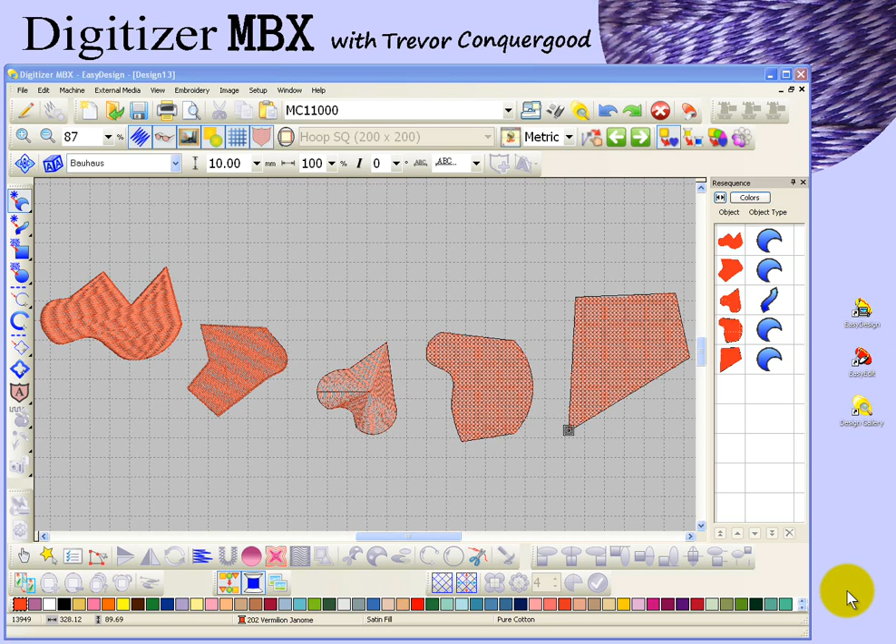In this segment, I'm going to take a look at the Turning Angle Fill tool. And that's found here on the left-hand side of your workspace, the top of the digitizing toolbar. So similar to the other tools that we've looked at so far, the Parallel Fill tool and the Circle and Square tool, this tool also has options.

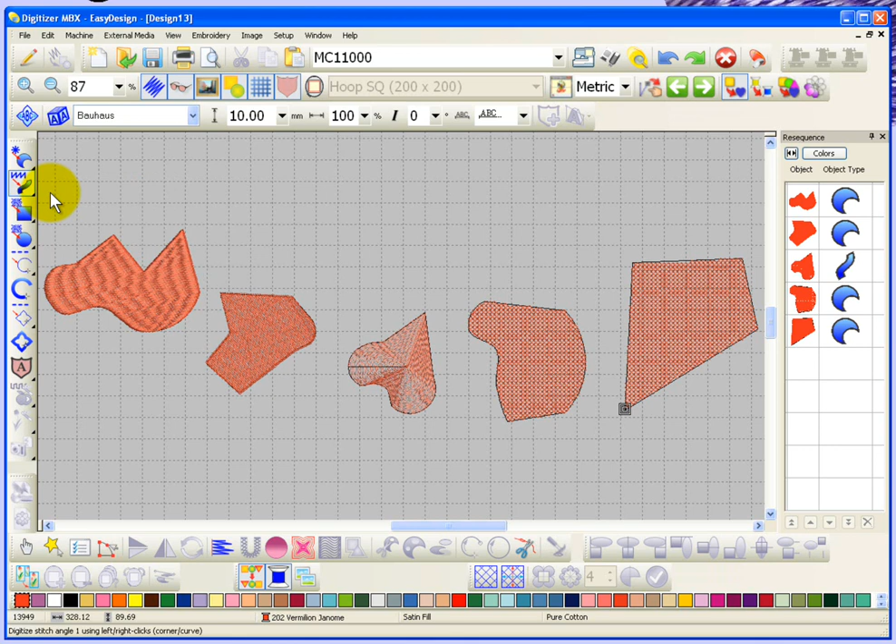And if I fly it open, we'll take a look and see that we have Turning Angle Satin Fill, Turning Angle Weave Fill, Turning Angle Embossed Fill, Turning Angle Contour Fill, and Turning Angle Radial Fill. So I'll go ahead and choose Turning Angle Satin Fill to start out, and I'm just going to clean up my desktop by saying Control-A and Delete.

And maybe what I'll do is zoom into a smaller area and show how this tool works. Now, this tool is very different from the Parallel Fill tool because we no longer need to draw the outline. In this case, we need to draw in sets of points that make up the stitch angles. So it kind of goes like this. Oh, sorry, I need to select the tool.

I'll put in the first point, and then I'll move over and I'll put in a new point, and that will be a stitch angle. Now, the mouse becomes connected back to point number 1, and I can bring it down and create point number 3 and point number 4, and those become the next stitch angle.

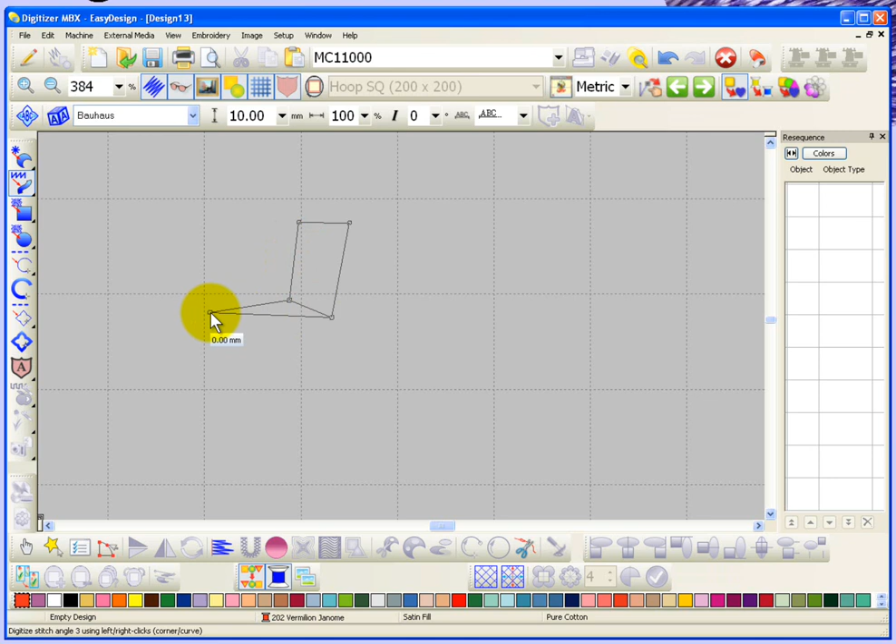And one more time, I'm going to bring it over and create point number 5 and 6, and again a new stitch angle. And I can keep going like this, putting in as many sets of points as you like until I hit enter, at which point it closes the shape and fills it in with thread. Now let's take a really close look at that object.

So you can see here that the stitches, this is why it's called Turning Angle Fill, because the stitches turn from angle 1 to angle 2 to angle 3 to angle 4. And so each of those sets of points is how we create this object. And like I said, the stitches are no longer parallel, they're turning.

So if I was to select that object and choose Reshape, you'll see that with this object, I have the ability to adjust the stitch exit point and entry point, so you can have it start anywhere in the design you want. You can have it finish in any place of the design that you want.

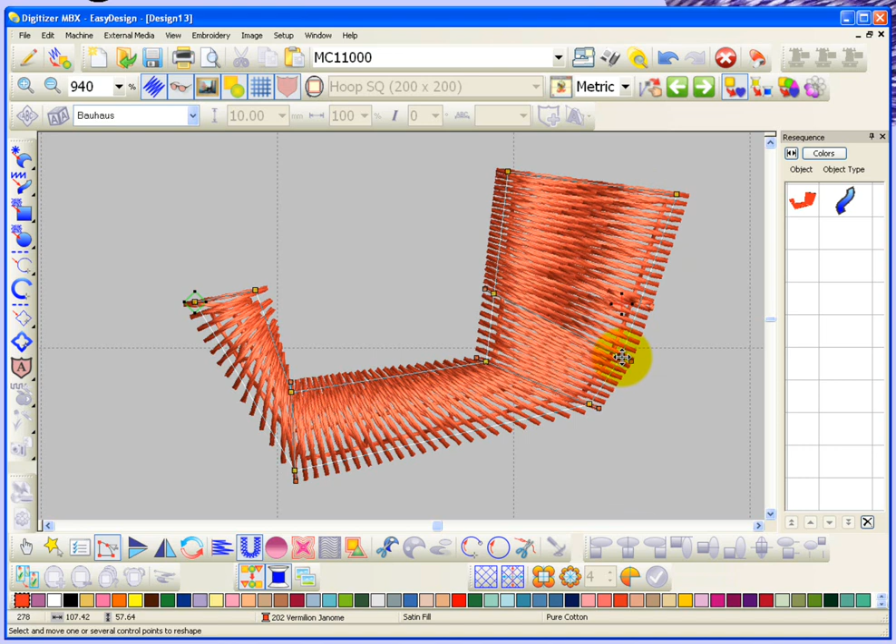And just like any other object, you can change the shape, so you can move the nodes. You can add new nodes just by clicking on the shape, and it adds a new set of nodes. But what's different here is the nodes have 2 points. Now maybe if I can get really close you can see this. Maybe if I turn the 3D view off, it helps a little bit.

Oh, and I actually just clicked on the line and added a second set of nodes there. I'm going to hit undo for that. So this is what it looks like. The yellow point is the actual shape node, and notice that right beside it there's a small orange triangle. That's actually an angle line for this set of points, and you can adjust them independently of each other.

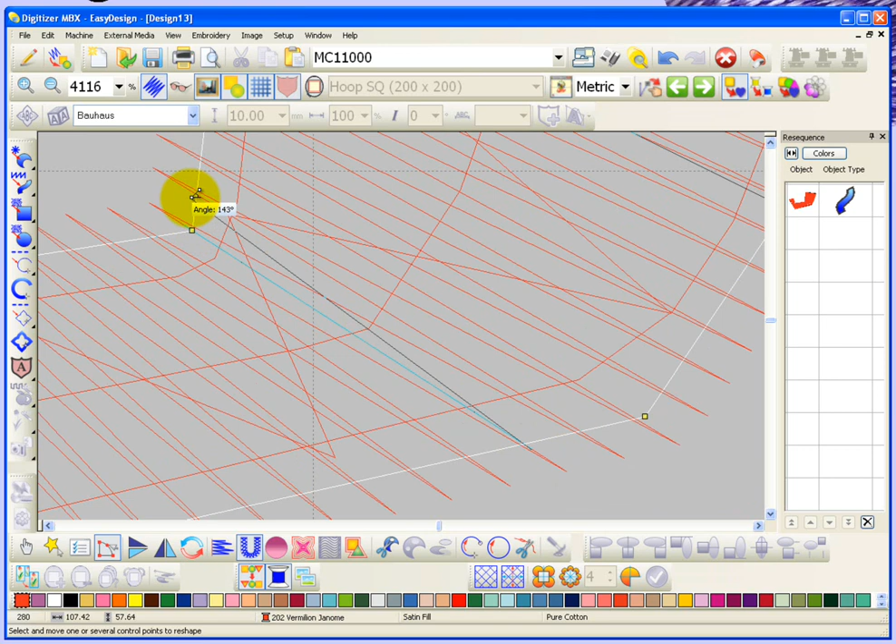So see, I left the shape node there, but I was able to turn my angle line just ever so slightly. So you have the ability to adjust your stitch angle after you enter in the shape nodes. But if you just choose to change the shape node, it will pull the angle line with it. Did you see how that worked? Let me get a little closer here.

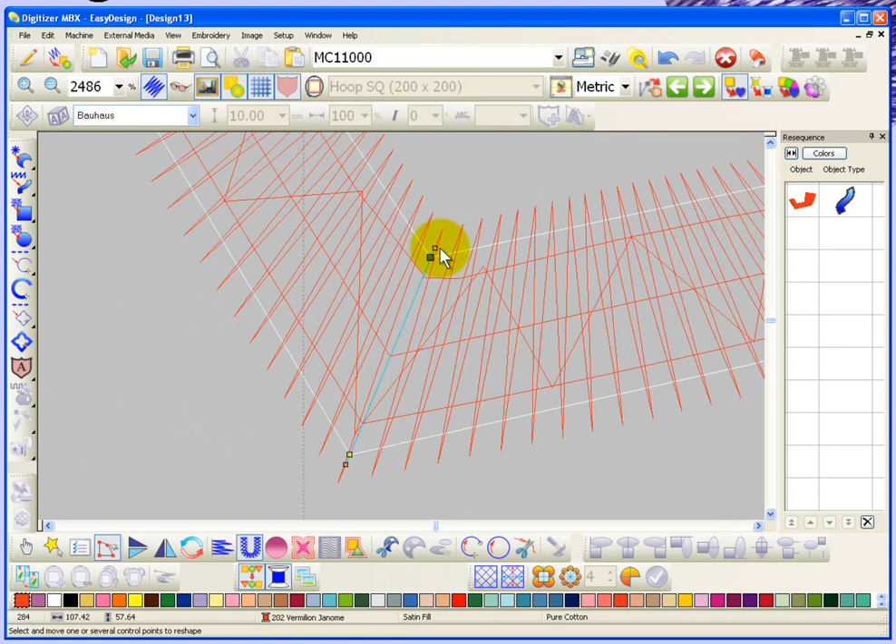If I just grab on this corner and move it, the angle node is moving with it. But if I grab the angle node and move it, it will change the angle independently of the shape. See that? And now if I move the shape, the angle line still sticks with it. So when you move the nodes, the angle lines move with them.

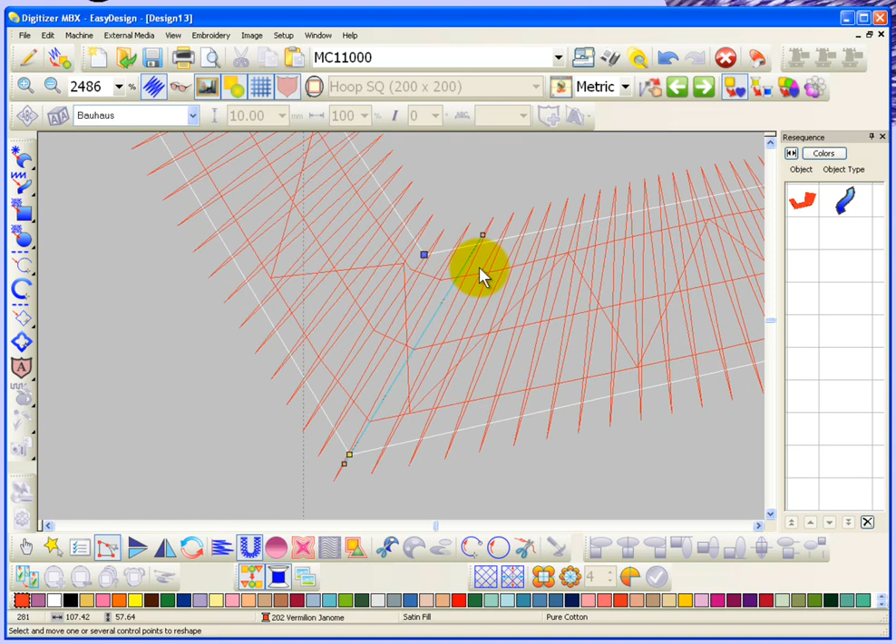But if you move the angle line off of the nodes, it will move independently of the shape node, but you can still move that shape node and the angle line gets moved with that. So that's a little bit different. Now let's go back to creating some more of these Turning Angle Satin Fills.

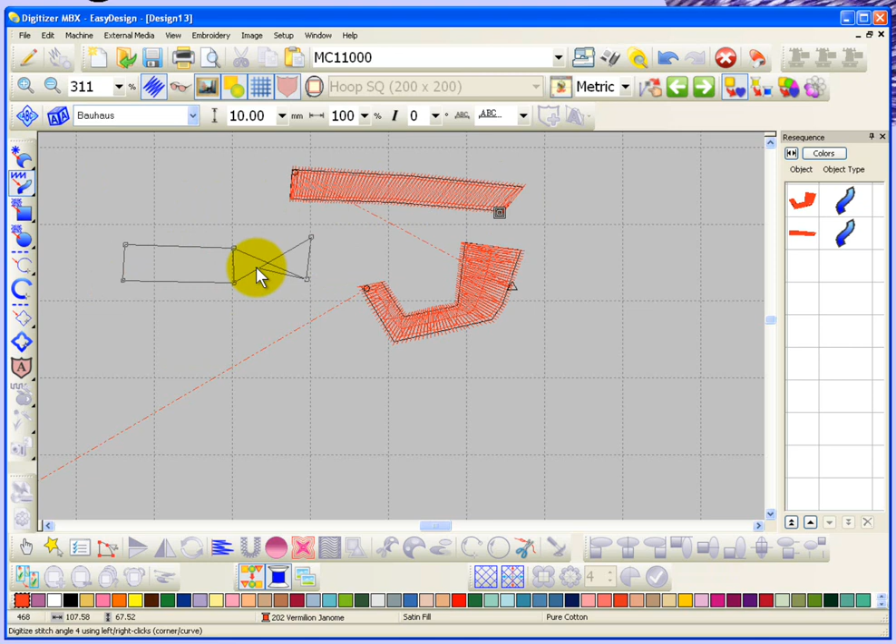And one of the things I like to say, this helps me to remember how to use the tool, is I might say to myself, top, bottom, top, bottom, top, bottom. Because if you cross the lines, I'll start another one. If you say top, bottom, and you're going along top and bottom, and then you switch and you forget and you go bottom, top, you've crossed your lines. And what happens is, if I hit enter, the thread kind of just twists onto itself a little bit and starts up again.

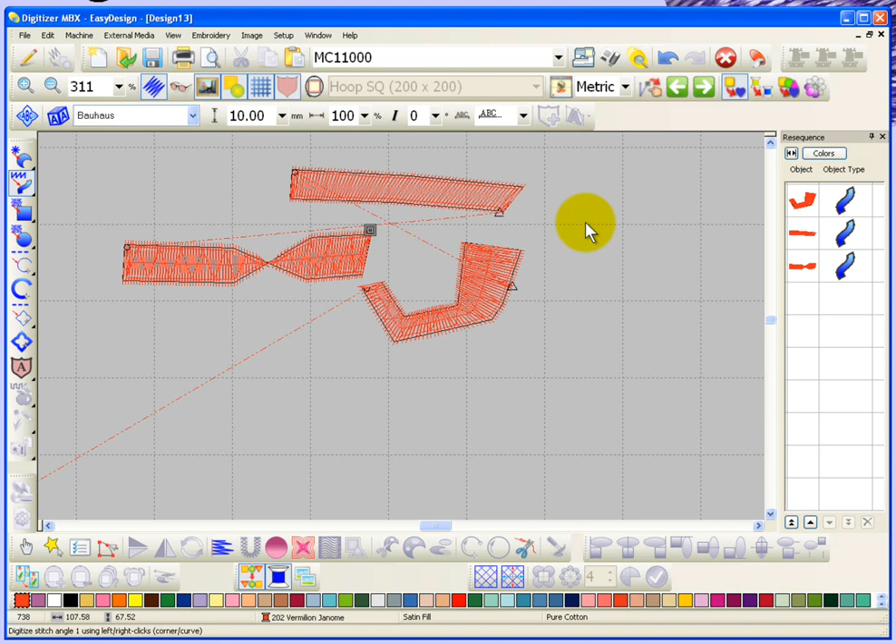And it won't necessarily be a problem for sewing, but you don't have a nice consistent border like it's meant to be, so you have to try to keep track of which side is which. Now, you don't have to say top, bottom. You may want to say left and right, or it could be something more like inside, outside, inside, outside.

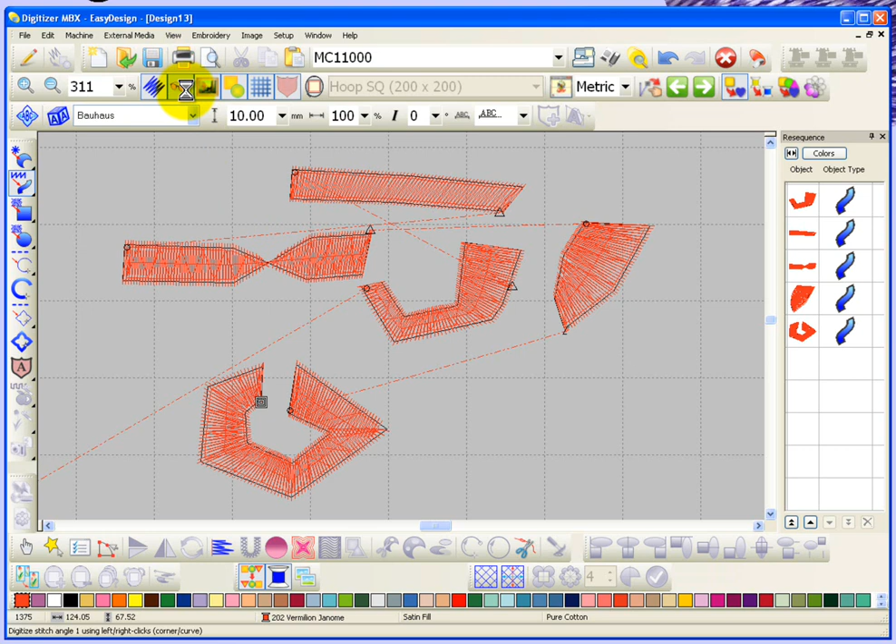So it's really up to you how you use the tool or how you remember which side is which. But that's one thing that I've found that works really helpful for me, is to be able to sort of keep track of side 1 and side 2 a little bit separately.

Now, that's parallel satin fill. We also have turning angle satin fill. We also have turning angle weave fill. And same thing, 1, 2, 1, 2, 1, 2. And primarily the difference is one has got stitches through the middle, one has stitches on the outer edges. And so, as you get into larger stitch areas, you'll want to switch to using a weave fill versus a

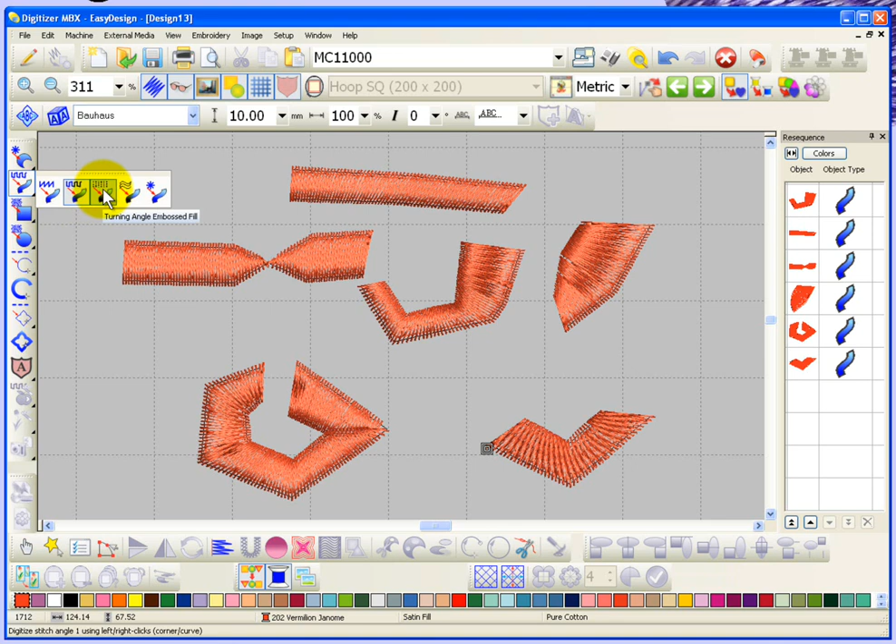satin fill. Another tool option would be a turning angle embossed fill. And again, I'll just go ahead and create 1, 2, 1, 2, 1, 2, hit enter, and you can see that although the stitches turn, they also have a pattern in the background. So that's the embossed fill option.

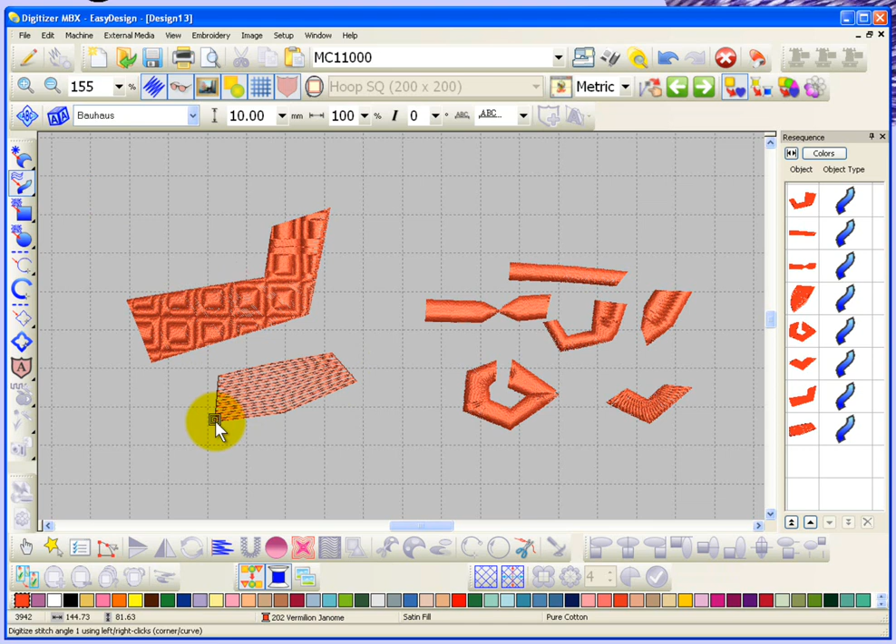So let's take a look at the next tool option here, which is the contour fill. And again, if I say 1, 2, 1, 2, and 1, 2, so I'll put in 3 sets of points and hit enter, and you'll see here that the stitches turn quite differently on my shape. Let's just take a look at that.

So that's the contour fill, and I'm going to go ahead and create a contour fill with the parallel fill tool, just so you can see the difference, and I'll create the same shape. So we'll put in here points with the parallel fill tool to create the same shape, hit enter, and yet the contour is very different. So the contour fill on a turning angle will look different than the contour fill on the parallel.

So if you use the contour with this option and you have a different sort of shape, you'll see the way that it contours around your shape. So there's 2 different contour tools that give quite a different result to the type of stitches. And really, you'll find there'll be places where one will just seem more appropriate than the other. So one way or another, this is the turning angle tool, which I call the 2-point tool. This is the parallel fill tool, which I call the outline tool.

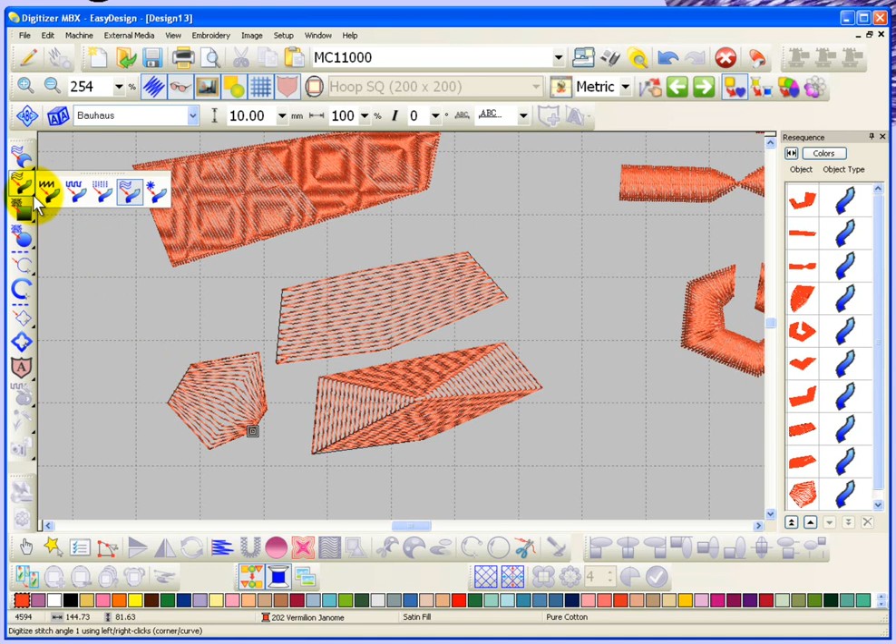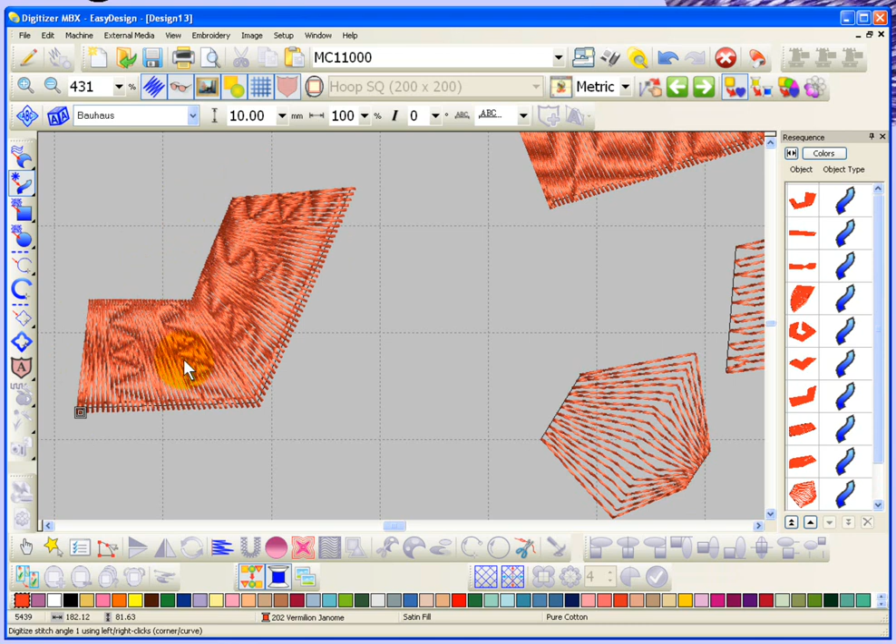Now let's see, I think there was still one more, so we can do the turning angle radial fill. And I'll just maybe make myself a little bit more space. And again, 1, 2, new stitch angle, 1, 2, and new stitch angle, 1, 2. I'm going to hit enter. You'll see that it has that radial fill pattern around the turning angle stitches. Yeah, so that's a little bit different tool from the parallel fill tool. This one's called the turning angle fill tool.

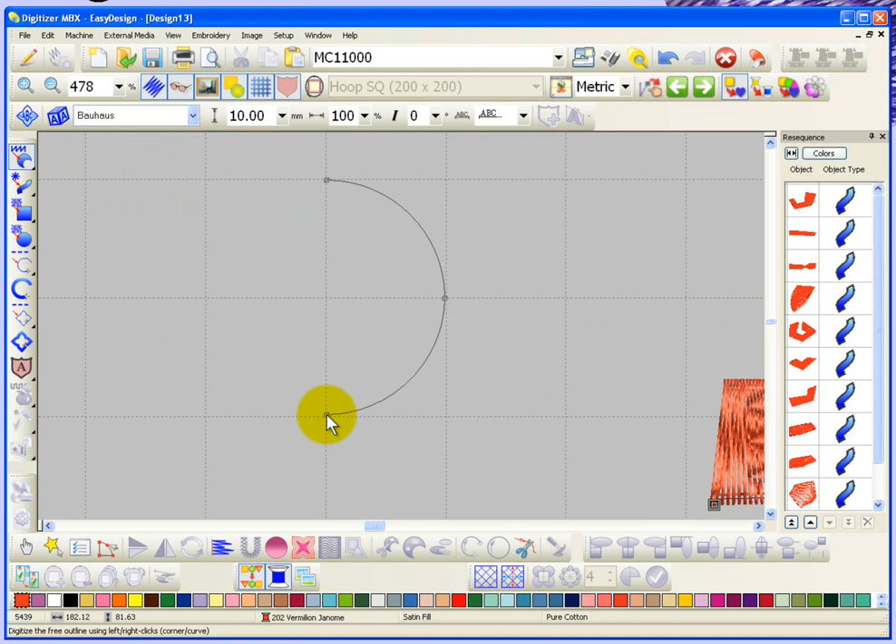Now, I'm just going to do a quick demonstration. I'm going to use my parallel fill tool to create a circle. So I'm just going to zoom in a little bit. Choosing my parallel fill, I'm going to choose a parallel satin fill, and we'll just simply go like this. Right click, right click, right click, right click, and when I hit enter, it's going to fill that circle in with thread. And that was created using the parallel fill tool.

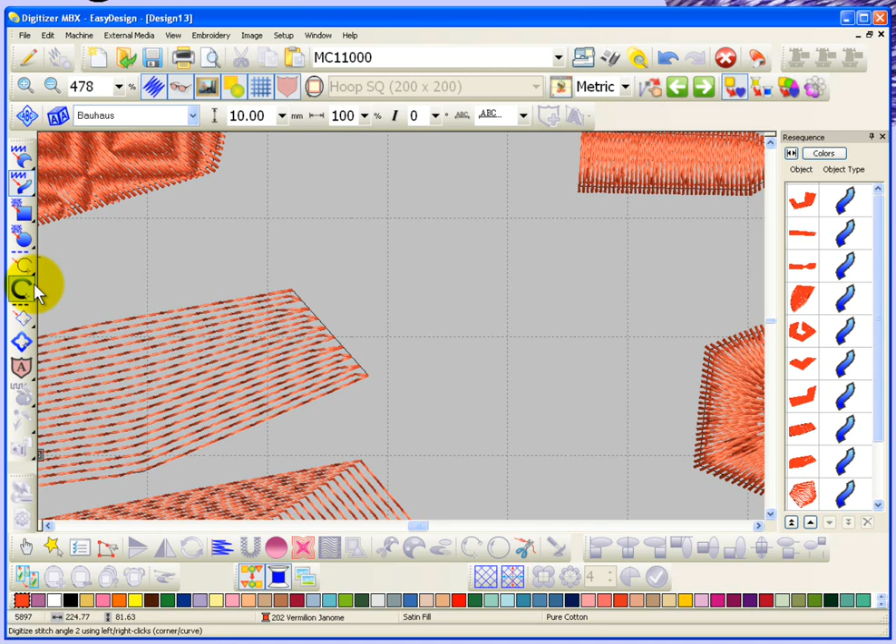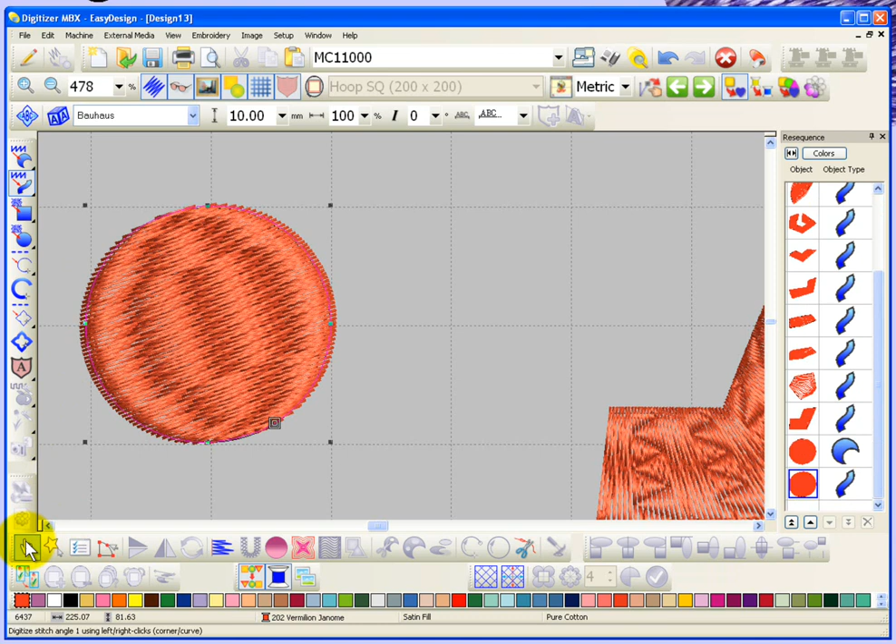Now, if I create a circle using the turning angle fill tool, I can create almost the same shape. If I go 1, 2, that's a stitch angle. Whoops, come back, that was my panning. All right, where was I now? 1, 2, that was a stitch angle. Now I'm going to create again 1, 2, and this time I'm right clicking to get the rounded points, and then coming down to the bottom again, 1, 2. So, very similar shapes, very similar stitches, but I created them using different tools.

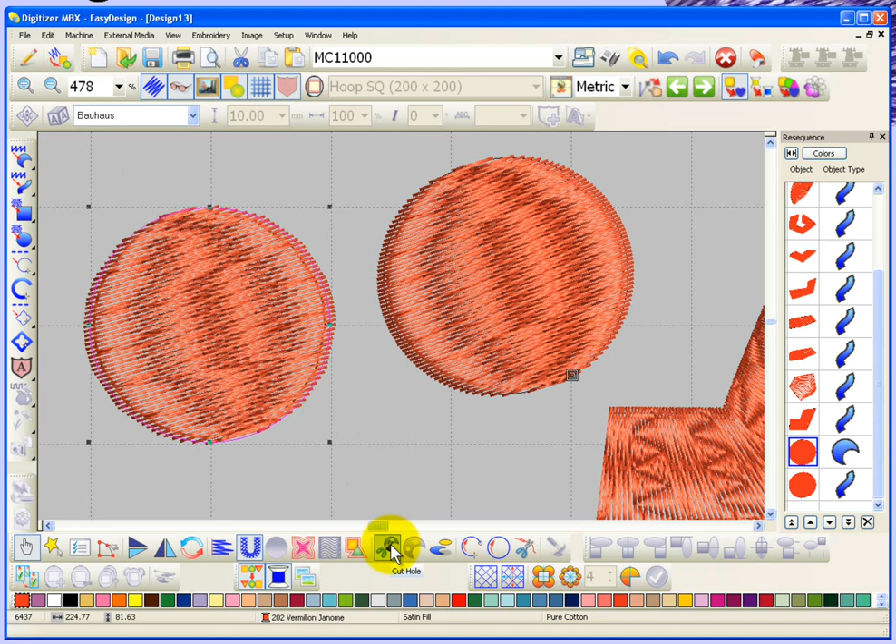Now, something I haven't shown, and I will come back to this, but I'm just going to quickly show this. For example, if I take the parallel fill tool, this was the circle I created using the parallel satin fill option. If I choose the cut hole feature, I'm going to cut a hole out of the center of this circle. Turn it into more like a donut. So there you have a parallel satin fill in the shape of a donut.

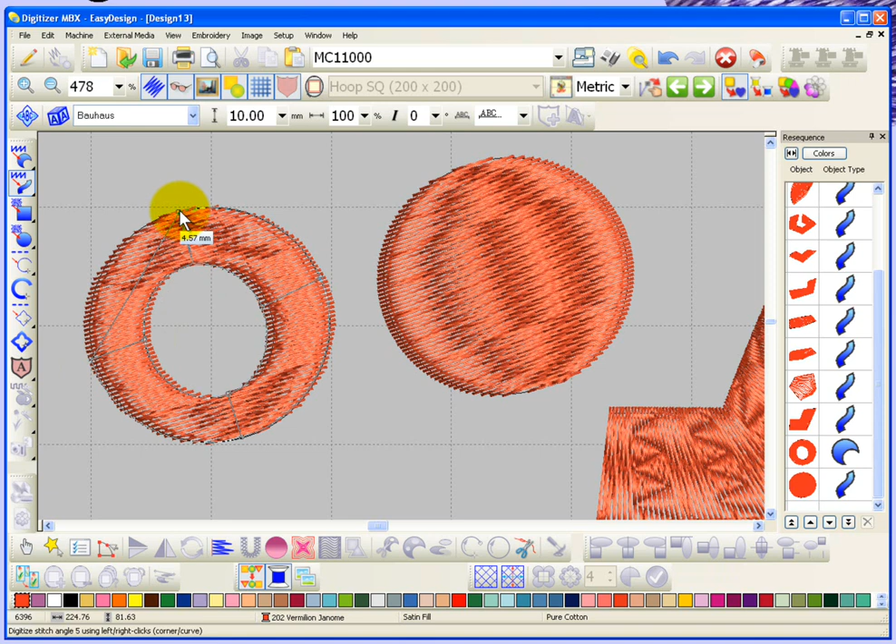But if I use the turning angle satin fill tool to create the same shape, I would need to go something like this. Inside, outside. And then I'll come over here and I'll right click, inside, outside. Come down here. Right click, inside, outside. I'm right clicking to get curve points. Inside, outside, and then one more time, inside and outside. And when I hit enter, it fills it in with thread, but now you'll see that although they're the same shape, very different stitch results.

You see, this stitch was created using the turning angle satin fill tool. And this object, this shape, was created using the parallel satin fill tool. And so here we can see the thread is parallel, all the same stitch angle. Here we can see that the thread is turning. What you can see here are known as shortened stitches, and I'll talk about shortened stitches again later, but basically they have to do with the fact that the stitch angle is turning quickly, and so the software is just trying to compensate for that by putting in a few little half stitches.

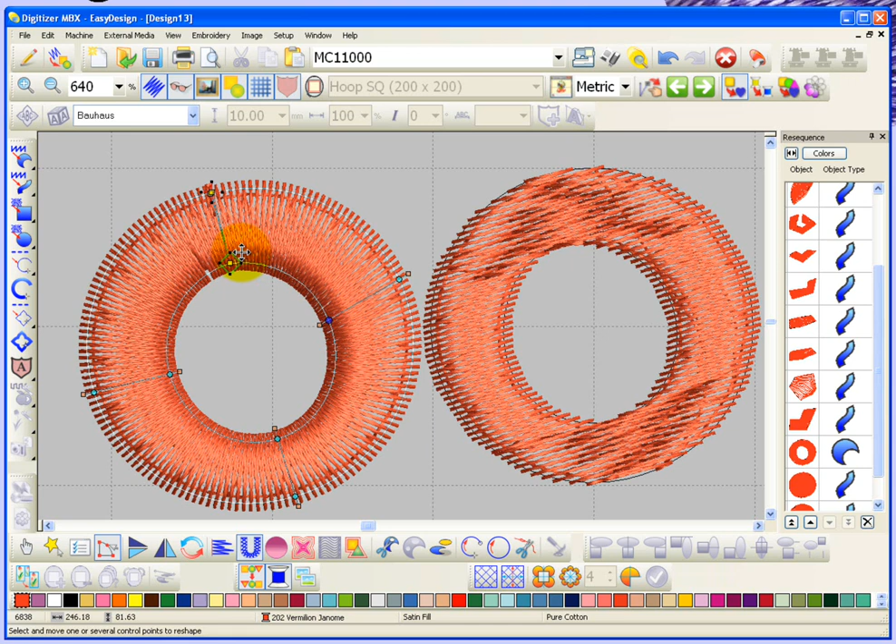And you see, as I move the shape around, I can actually adjust those half stitches so that they're not there. But they're not actually visible when you stitch the design out, and it gives you a lot better sewing results when you have that in there. So that's the turning angle fill tool, and also kind of a comparative with the parallel fill tool. So again, parallel fill tool, you create the outline. Turning angle fill tool, you create sets of 2 points.